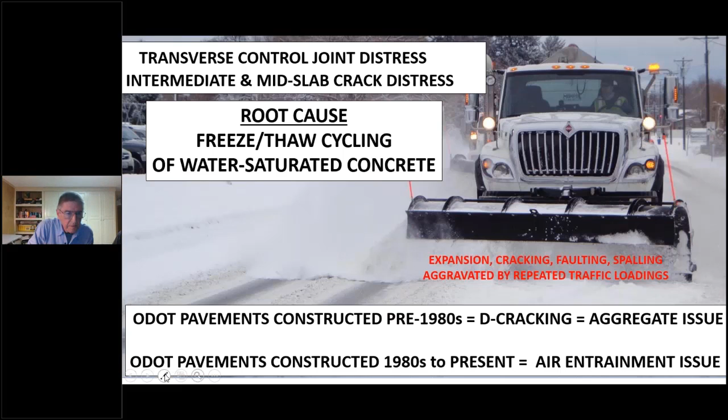The problem is still involved with freeze-thaw cycling and distress associated with it, but in this case it's an air entrainment issue, which I'll discuss.

At the end of the studies in the 70s, a test pavement was constructed on one of the state routes around Vermilion, Ohio. It's 4-lane, 105 test sections, and that was monitored over that period, 75 to the early 90s. The PCA researchers at the time came up with a number of interesting conclusions with respect to what was affecting D-cracking at the time, which we'll talk about just a little bit.

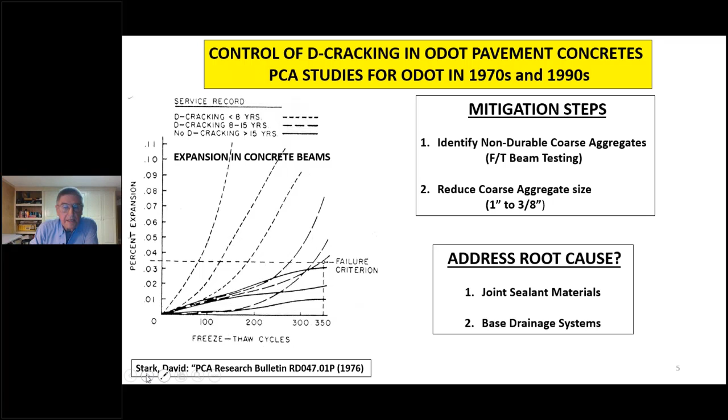But at the time, ODOT thought that the D-cracking problem was pretty much in control with the reduction of the coarse aggregate size, and that has been the case. So not much was done about the joint sealing or base drainage since that time.

The study that I mentioned in 2008, 2010, I was involved in with Ohio University. I can actually identify those publications that you'll have an opportunity to see.

We looked at 20 different PCC pavements in 11 different counties around the state. The pavements were selected on the basis of having shown above average performance, trying to see what was done right back then, so that was the case.

However, it was recognized that the joints and the slab cracking and distress were a major part of the problems, even with those. So all of the cores that we looked at were taken through the joints and through the cracks, and we took them in a region that was not yet showing distress in the wearing surface.

In a functioning air void system, on the left, in front of the advancing ice front, the water gets pushed into our little open rooms, which are the air void cavities, and is allowed to freeze in there, so that when the expansion from water to ice takes place, it's accommodated.

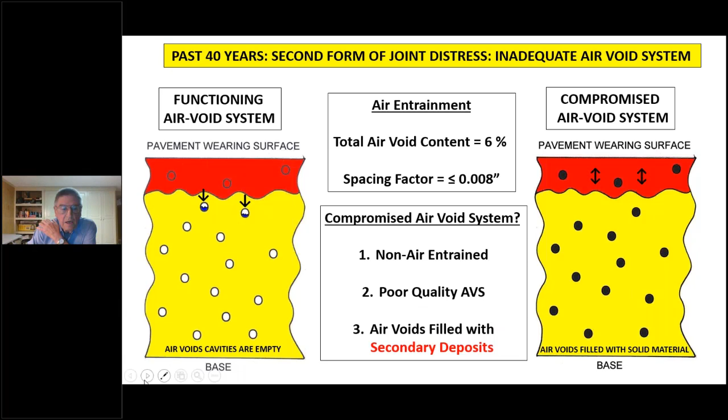We did not find any of our 20 pavements where the concrete was non-air entrained, and even in the case where the air void content was down, the spacing factors looked good. So what we've seen in all 20 of these pavements in the joints is what I'm going to be describing here, where the air voids are filled with secondary deposits and lose their ability to perform their intended functions.

What I'm saying is that if you consider that this is the joint area here, during cycles of freezing and thawing, during cycles of moisture migration, secondary deposits are moved to the air voids and they do get filled. I'll show this in the petrographic evidence.

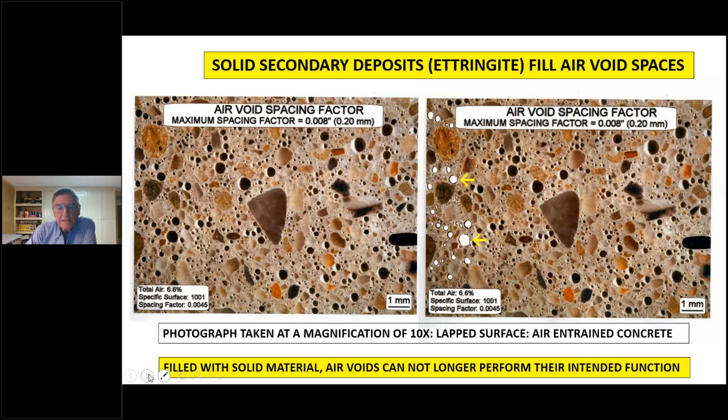So you'll see that the air voids in and around the joint are filled with secondary deposits, which primarily are ettringite. We think of ettringite as a destructive form of attack, but in this case, the ettringite in the air voids is innocuous, and it's very, very common. In fact, it's unusual to not see it.

So we look at the cores that we took where there was no distress on the wearing surface.

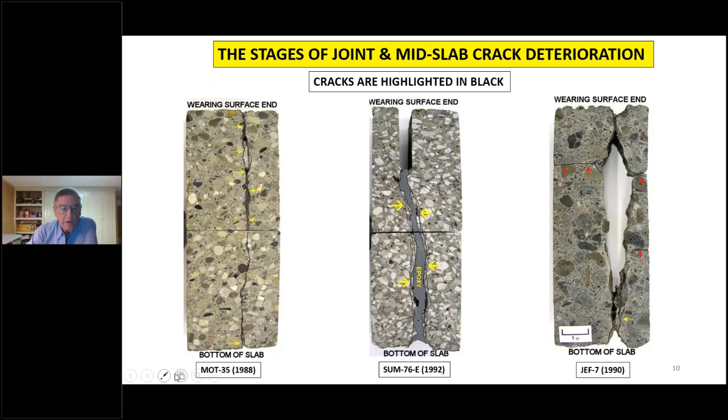Over on the right, you have the situation where the entire center portion is now missing. This was a State Route 7, Jefferson County, about 1990. Now, with the loss of support, you have traffic-induced faulting and cracking at the top of the slab as well. Those are pretty much the sort of things happening, but it's the same phenomenon going on, just in different stages of progression.

This is a photograph, a little enlarged view here of the center example there. This is Summit County, where in this case it was a neoprene joint sealant material. It was completely gone, and now you had a lot of scaled material that actually came out during the coring.

Spalled, I should say. And then these are cracks here, microscopic in size, but they're there. We would expect that the deterioration would continue over cycles of wetting and drying and freezing and thawing, and eventually, with support loss, we would start to lose the section up here.

At the bottom of the core, we're beginning to see the start of that cone-shaped type of failure as well. What we're going to do in the next two slides is show even closer microscopic pictures of this area, which we'll designate as area A, and then the area at the bottom, which I'll designate as area B. We'll be looking at this under the microscope to get a clearer picture of what's going on.

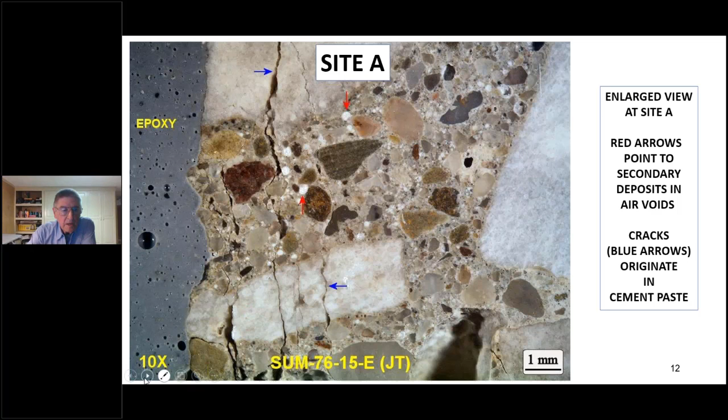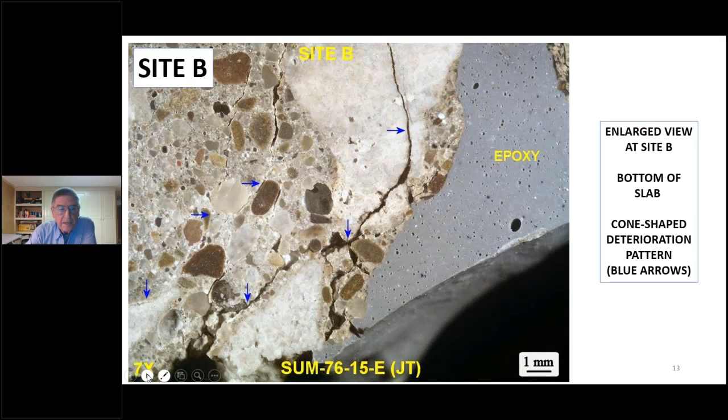So the obvious logic there is, if you solve the joint crack distress problem, you're going to extend pavement service life. And to that end, I talk about this whole situation.

We know how to make sound, durable concrete today. 19 of the 20 pavements from the study I was involved in were just good old Class C, ODOT Class C concrete. It was made with water-cement ratios like .43 to .48. They were air entrained, and half of them contained fly ash, so they had low permeability. But we can make good concrete, and when you rehabilitate or remove pavements, the stuff on either side of the joints and cracks comes out as big, large chunks that are still in pretty good shape. So we know we can make good concrete.

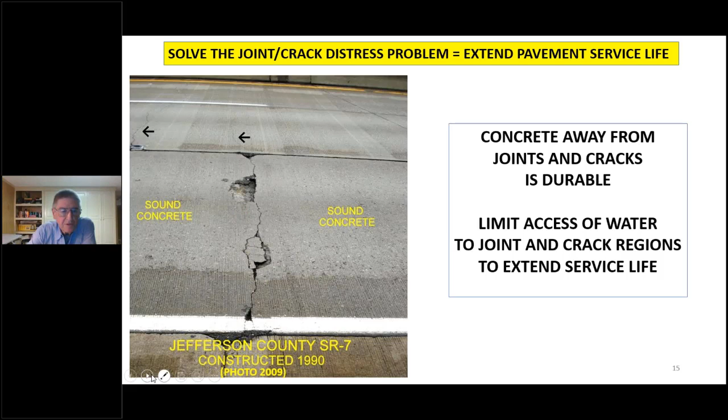So we can get a handle on this situation. We can be looking at, and I want to use the term, 50 to 100-year pavement life. So is it possible to keep the water out of the joints and cracks in the PCC pavements? The answer is probably not. We can't keep it all out, but if we had joint sealing materials that worked and are durable, and base draining systems that worked and are long lasting, it sure could go a long way toward making things better and getting more life out of our pavements.

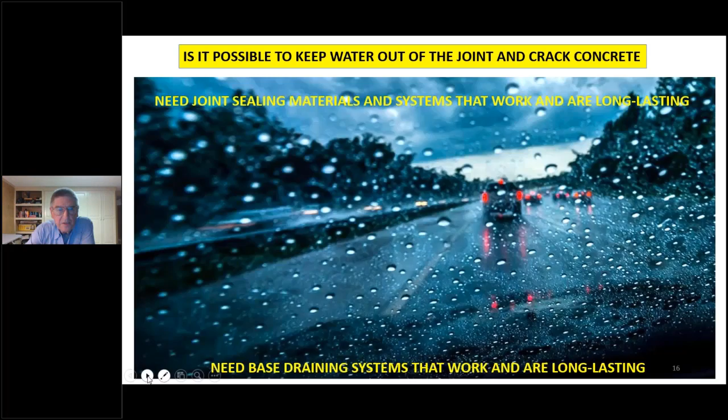PCA workers did look at that situation, and they found there was a lower incidence of D-cracking where hot pour sealant was used compared with the neoprene preforms. They said the incidence of D-cracking was still relatively high all over, but the conclusion was that hot pour sealants are in the right direction, so they're certainly worthy of further study. And of course these days we have a lot of synthetic polymers that weren't around back then too, that could function perhaps just as well.

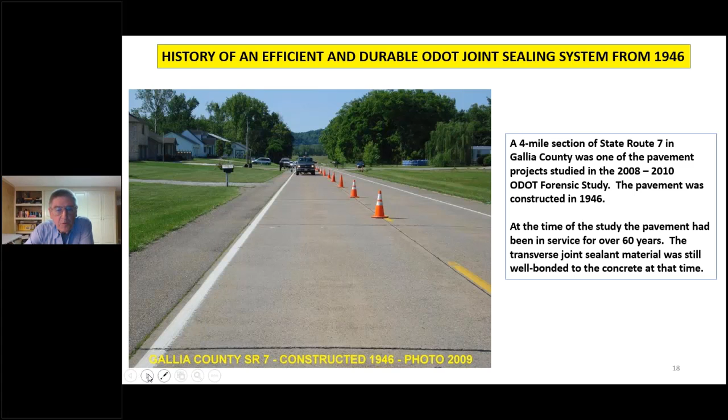We have an example of an efficient and durable joint sealing system in a pavement constructed in 1946 down in Gallia County, a 4-mile section of State Route 7. We took cores there in 2009, over 60 years of life. That pavement is just being removed now, so it's over 70 years of life. So there's an example of, yes, it can be done. 40-foot joint spacings here, 8 inches thick. Now granted, it is a state route, but the majority of the joints were looking good at the time we took the cores.

They had at that time, 1946, a joint sealant material and a design that is not used now. The joint was formed with a metal joint form that was flared at the top, about 3/4 inch at the top, about 2 inches deep.

That was put in at the time of pavement construction. It was removed when the concrete received initial set. They waited until the concrete cracked, and then poured a sanded bituminous hot melt into the formed joint space, which filled the space they had created, and also went down into the crack itself. Those were still there at the time we took the core.

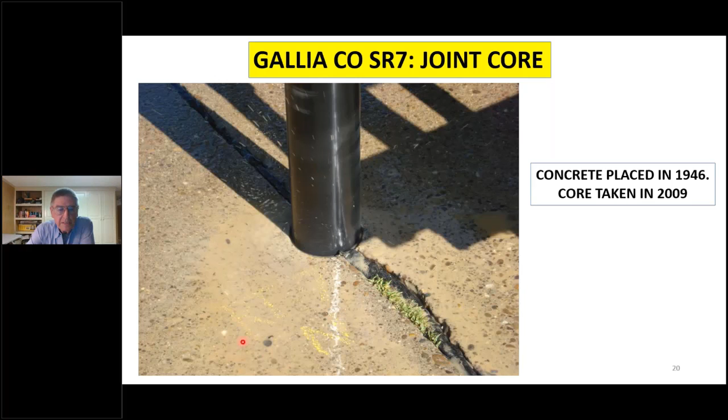This shows the coring, and you can see the material is still elastomeric after 63 years. The core was taken and looked at. We sectioned it and lapped it, and this is that core from the transverse joint.

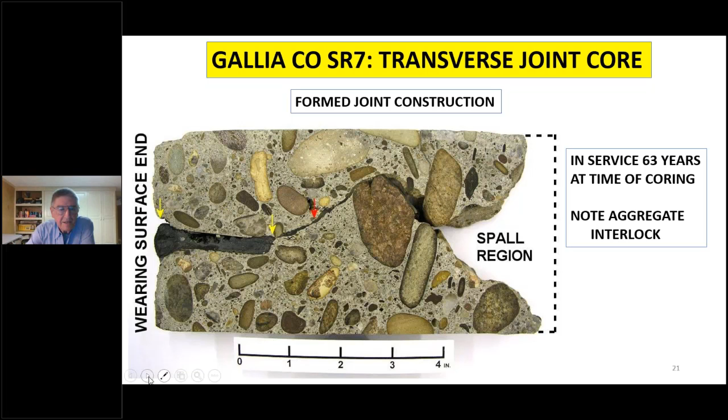So we have a lot of things to think about here. Base drainage - the researchers back then said D-cracking can be delayed and possibly eliminated by the use of drainage facilities, and it should be considered, recognizing the root cause. They also had test section number 4 out of 105, where the maximum aggregate size was 1.5 inches, and the granular base was daylighted, carrying through the shoulders, so there was base drainage there. That particular section had 17% D-cracking in the joints versus 65 to 94 in all the others.

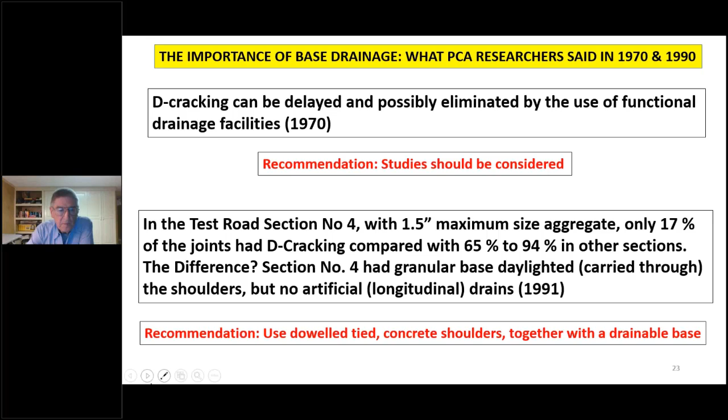They recommended using dowel-tied concrete shoulders together with a drainable base, again recognizing the root cause of the problem as being pre-soaking the concrete in saturated condition - keep the water out. So I think it's not illogical to think we can do 50 to 100 year PCC pavements in Ohio. We know we can produce durable concrete pavements themselves, even good old Class C made right, particularly with fly ash these days. Maybe that should be mandated to keep the permeability down.

Looking at joint sealing materials and design, we have some precedent to go with there, as well as drainable bases. This probably can't keep all the water out, but reinitiating some studies on the bases and joint sealing materials seems certainly worth considering. Also, if we can do that, we can start using bigger aggregate again to produce aggregate interlock, which is also going to improve the stability and structural integrity of the joints.

So that's my story today. I appreciate your time and your interest, and I look forward to hearing your comments and questions. Thank you very much.

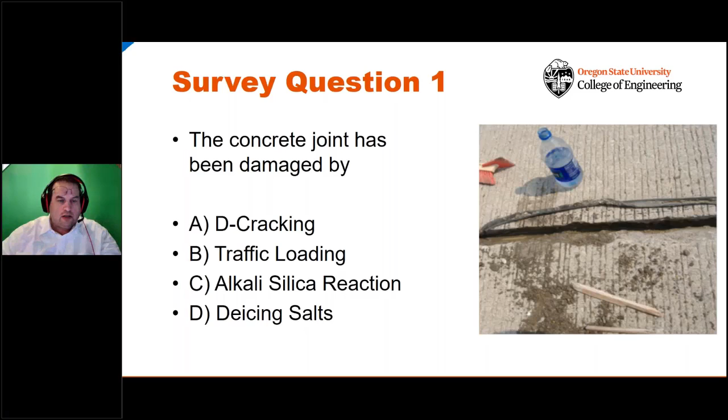We'll start off with our first poll question. The real question I'd like you to be thinking about is this: this is a concrete joint, this happens to be in your neighbors to the west, and this happened to be a quality award-winning pavement. The question is, what was really the cause of the damage in this joint? Is it D-cracking? Is it traffic loading? Is it ASR? Or is it de-icing salts? I'll give everybody a few seconds to think about that and put their answer in. I'll mention that this is one of the joints that's really driven a lot of the work we've done over the last 15 or 20 years.

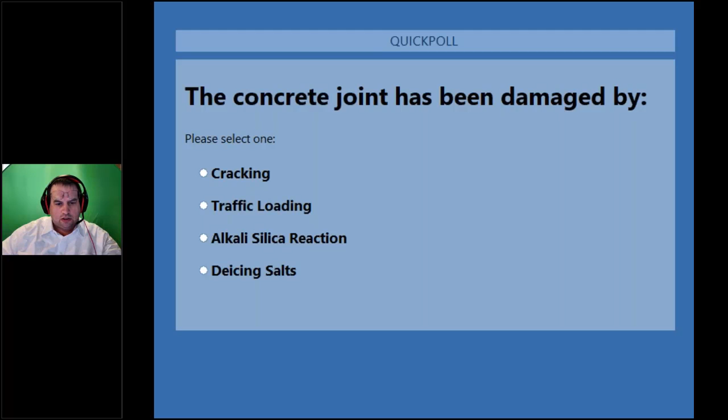We've got about 5 seconds left for folks. If you answered de-icing salts, letter D, then you're all set, and that is the direction we really want to go. I believe, okay perfect. So what I'd like to do now is get into a little bit of discussion on what we're doing around the deterioration of pavement. I think I need to go back and show my screen again.

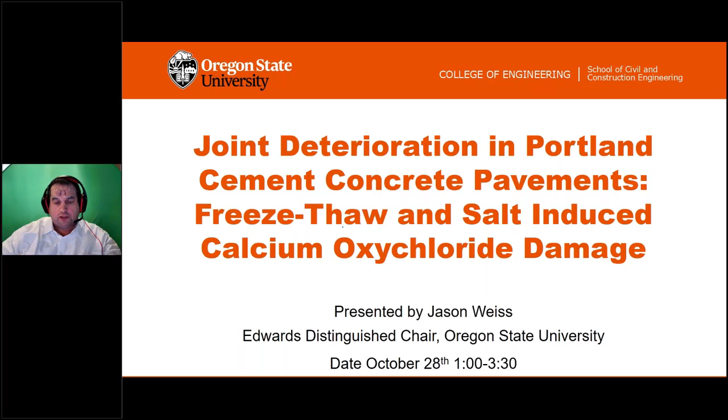So what we'd like to do is talk a little bit about the joint deterioration that's happening. We believe there's an additional chemical reaction taking place that can be responsible for some of that infilling and some of the damage we've been talking about. So this is a big issue.

This is damage that's happening at joints across the nation. When we first started doing this, we asked around and we were told it was an Indiana problem. Then we were told it was a Midwest problem. And if you define the Midwest as anything that stretches from Maine to Oregon, from Canada down to almost Mexico, then it is a Midwest problem.

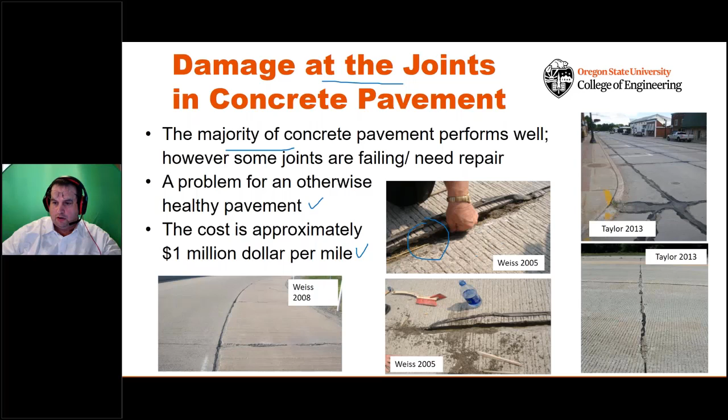But the issue here, as was previously mentioned, is the majority of concrete pavements are performing well. However, some have these joints that are starting to deteriorate. This is a problem because you have a great pavement otherwise, and it's costly to go out and do some of the repairs on this. What we really want to talk about is what is the cause, not necessarily who to point the finger at, but how do we start to solve this.

So when we first got involved in this, I went to a meeting and looked at my notes a couple years afterwards, and I went through and saw all the people who were blamed as part of this process. What I'd like to do is suggest that there may be times where there's something additional going on in these cases.

Over time, we developed a little bit of a working mechanism. This is primarily developed out of what was done in the state of Indiana, but the whole idea is: they'll come in very early and put a saw cut in. That saw cut comes in. The second step is we get cracking in the pavement. That crack will essentially help stabilize the width of the joint. They come back, widen the saw cut, put in the backer rod, put in the sealant.

When all this is done well, it keeps fluid out from getting into the joint. But as was discussed in our previous talk, it's all too often that this sealant didn't work really well. So the sealant detaches in some way, fluid gets into the joint. What we noticed is many times the joints didn't crack. So the fluid was essentially sitting in this joint, saturating this region of the concrete, leading to a high degree of saturation, which could cause this portion of the concrete to fall off and spall, or we can start to get progressive layers of this de-icing salt damage that you saw with that progressive microcracking shown in the previous talk.

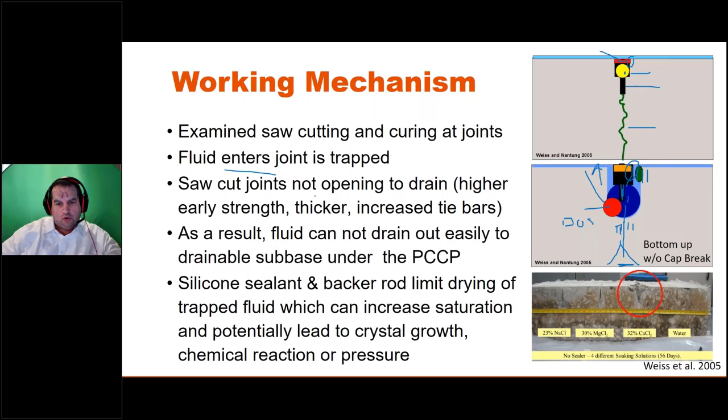So the idea here is fluid enters these joints, and I'm going to use fluid instead of water because it's going to be very concentrated in terms of the salt that we're dealing with. The joints are not opening as much as they needed to, and we're essentially getting this fluid trapped, and it starts to react. As I mentioned, it's not just water, it's salt. There's a couple things that are really important about this.

First, we change the properties of the fluid. Salt water is much more viscous, and in fact we add viscosity to these systems to get the salt to stick to the surface. This changes the transport properties. The second thing is the salt itself changes the saturation of the concrete.

The third item is we can get a potential reaction that takes place inside of the cementitious system. So if we look at relative humidity versus the concentration of salt, what we notice is there's an equilibrium point that we can see here for the three most common de-icing salts. Anytime we're below this relative humidity, we're going to suck water out of the atmosphere to try to raise the humidity level inside of the system.

So what this means is when you've got a salt inside of your system, you're going to have concretes that stay saturated for a much, much longer time. We don't get the evaporation that's taking place. So if you have, for example, 25% magnesium chloride sitting in the joints, which is very possible, drying doesn't start to take place until you drop below 60% relative humidity. Above this, you're going to see moisture just getting sucked into the overall system.

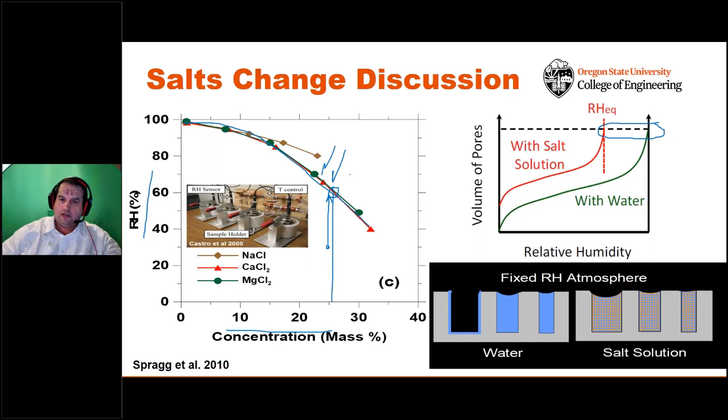The second question I would ask here, and maybe we won't go to the poll just to prevent any challenges with the screen, is: the degree of saturation in concrete that has de-icers applied is higher than, lower than, or the same as concrete in the same environment without the de-icing salt applied. And I think what we all can tell is that we're going to essentially get a higher degree of saturation.

This is incorrect, we should have had the answer of A. We're going to have a higher degree of saturation, so we're going to essentially get more freeze-thaw damage, more typical classical freeze-thaw damage, but that's not what I'm going to spend a lot of time discussing today.

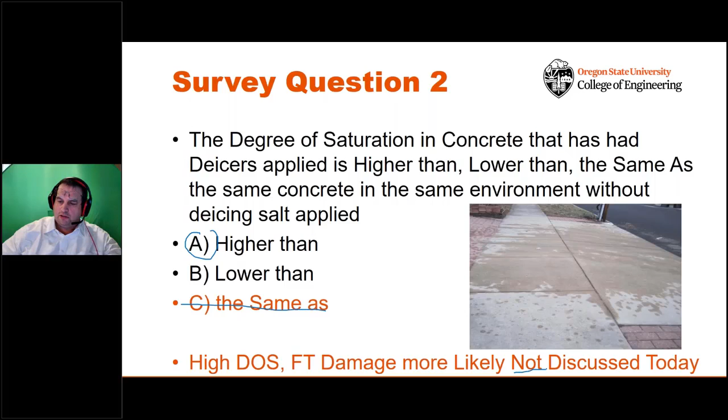So we can get higher amounts of water in the system. That water sits in the joints. The fluid isn't necessarily water. It's going to fill in the pores with secondary deposits, as was talked about, and we have a degree of saturation model, but this isn't the part I'm going to talk about today.

What I'm going to talk about is the other side of the coin: the fact that there's a chemical reaction that takes place in this system, and these newer salts that we're using, and the pre-application pre-wetting of the salts that we're doing, are giving us new reactions that give us a new problem that is something we haven't been aware of historically in the cement and concrete world.

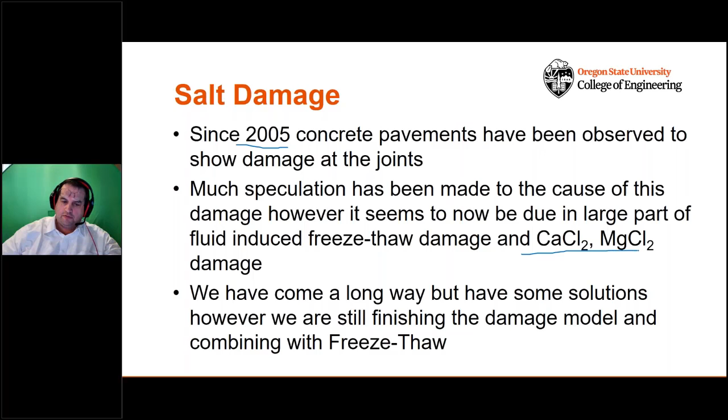So this is a little bit of background, but the whole idea here is there's lots of attention that's been placed on this over the last 15 or so years, and it really has to do with the growth of new types of de-icing salts that are being more widely used and the use of these salts in pre-wetting events. So what we really wanted to do is start down a path of identifying the reactions that could take place. Once this was done, there was a lot of fundamental science that needed to be done to really look at the reactions and see what temperatures they happened at, to develop a test that could tell us about these reactions, examine some potential solutions, and then really start to move this into full-scale applications and field use.

I'll also briefly touch on some computational modeling that we're doing, where we can now predict the behavior of these systems before they're ever even in a trial batch.

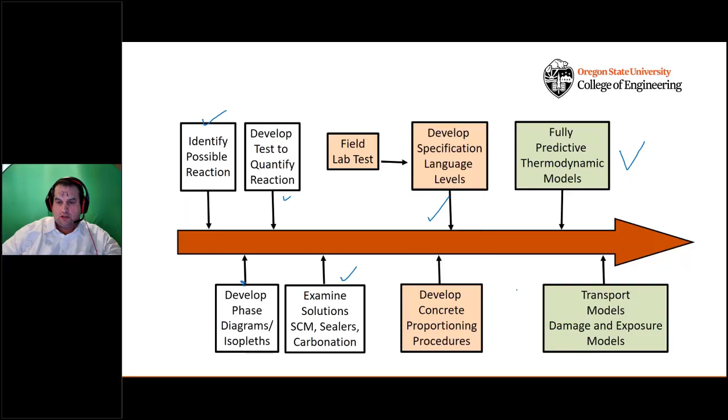We can start to predict the overall behavior of the systems. So now is where it really starts to get fun and gets exciting.

This is commonly known, and if we look through the literature, this is described and is probably going on in hundreds of chemistry classes each day, this sort of technology that we've talked about here.

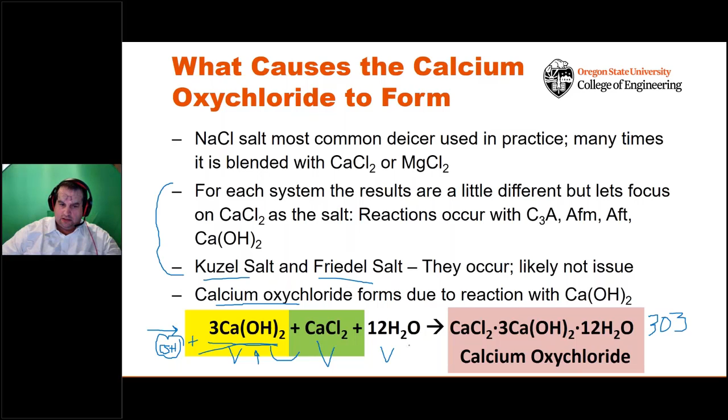So just to put this into perspective, we freak out about designing our mixtures to withstand water transforming to ice, which is about a 9% volume change. But here we have a 300% volume change going on in the system. Clearly, this can be leading to some of the damage.

So what we've done is we've developed a simple test. We take some ground up cement paste, put it together with the deicing salt, and increase the temperature from about minus 90 degrees up to about 50 degrees.

Some people have said, why do you go to minus 90 degrees? It never gets that cold even in Ohio. The reason we go here is because we want to get all of the phase transformations to take place so that we can quantify what's happening in the system.

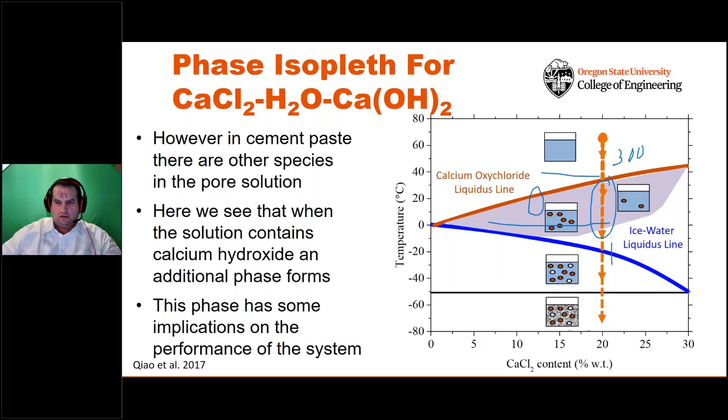There's some really big implications here, because now we're forming this oxychloride, this expansive phase which can be damaging our concrete. There's a couple things really scary about this. One, it's about a 300% volume change. The second scary thing is the temperature range it's happening in. So while we may have 150 or 200 freeze-thaw cycles a year on a concrete pavement, we may have 800 oxychloride cycles because of the temperature range it's happening in. This can have some really significant impacts.

So how do we solve this problem, or what are some potential solutions? One of the simplest solutions is to dilute the system, to use less cement. Lots of times people say, well, I want to use more cement because I want to make it stronger. But by using more cement, you make more calcium hydroxide, and by making more calcium hydroxide, you make more calcium oxychloride. You've actually exacerbated the problem, not solved it.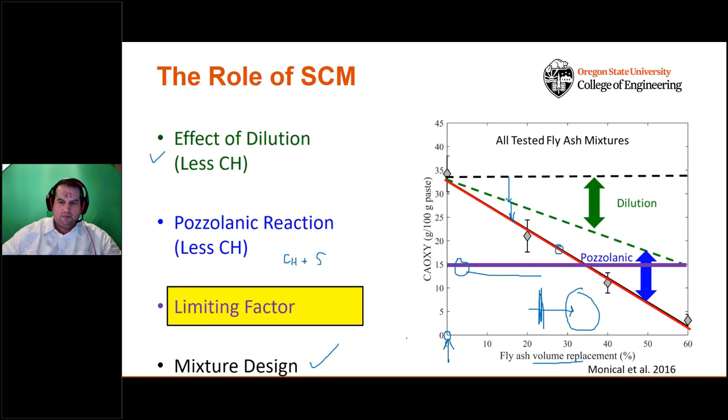Now, a couple of things you'll notice: we can measure the flexural strength of the paste. If we expose these pastes to de-icing chemicals, we see a slight reduction even in systems without oxychloride forming. We tend to see about a 10% decrease, simply because of the dissolution of the calcium hydroxide. The calcium hydroxide just leaves the system, it dissolves, and we see a small decrease.

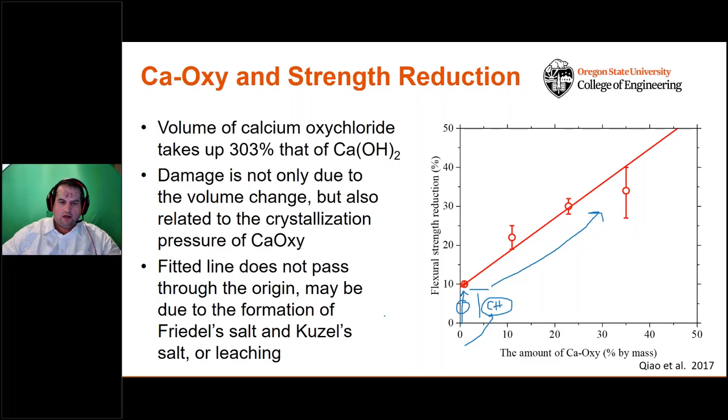But as we get more and more oxychloride going into the system, we see bigger and bigger strength reductions, because we're introducing microcracks, we're introducing damage in the system, and we're starting to cause these problems.

So again, I'll ask a simple question here. We won't go to the poll question just to make sure we don't lose connection, but: adding fly ash material makes my concrete more susceptible to joint damage. As such, I should specify concrete pavements using straight cements and add a little extra cement to make it stronger. Is this true or false?

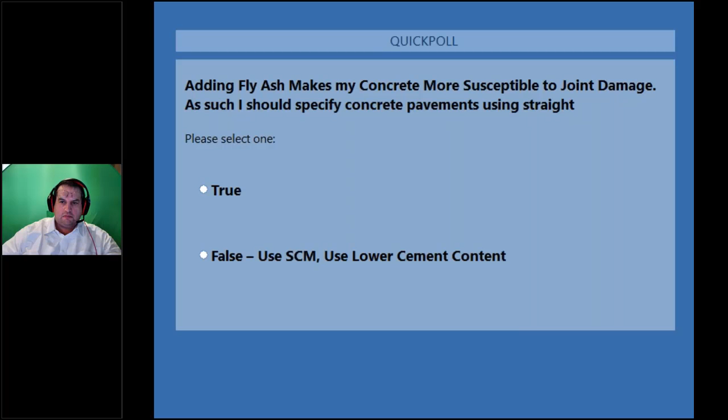Well, hopefully now we've seen that fly ash actually makes things better. The whole idea is we want to use more SCMs, use lower cement content, and this actually makes our concrete much more durable. So this statement is completely false. Fly ash doesn't make our concrete more susceptible to damage, it makes it less susceptible to damage. Straight cement mixtures are the most prone to these types of damage that we can have.

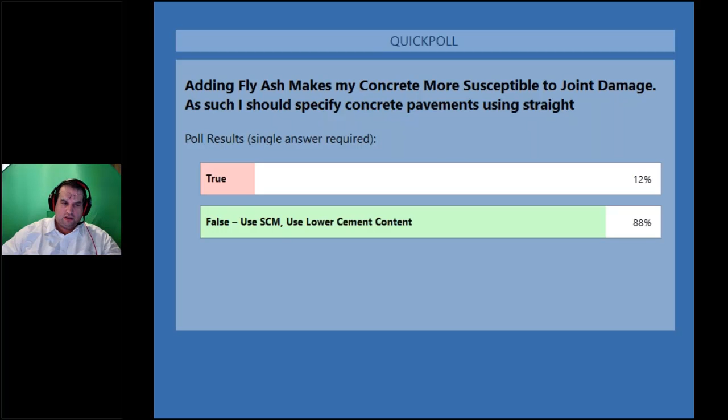This is one of the things we observed in the labs, and we were told many times that we were wrong on this. Everybody said, oh, the damage occurs on freezing. The damage doesn't occur on freezing. The damage actually occurs on the expansion, because the oxychloride is redeposited in spaces it wasn't supposed to exist.

So here's a little bit of information on the oxychloride itself. Here's a picture of this from Karl Peterson and Karl Peterson's group. You can see kind of a crystal. On its own, it's a really pretty looking crystal.

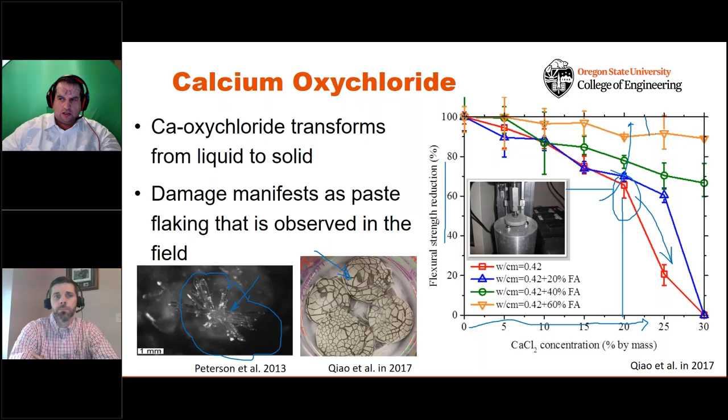And if you go higher than that, the strength goes almost all the way down to zero. One of the ways you reduce this potential for damage is to use more and more fly ash, and the only thing you're going to see here is a little bit of dissolution happening in the overall system.

Now, one of the things that we did was we said, is this just one fly ash, or is this just one mixture? At the time this particular paper had been created, we had tested about 300 different mixtures from across the Midwest. What you'll notice here is calcium hydroxide plotted as a function of fly ash replacement, with all the data plotted here at 20% and 40% replacements. What we notice is a very, very consistent trend.

As we add SCMs, the amount of calcium hydroxide, the amount of calcium oxychloride, decrease. Now, on the graph on our right-hand side, you may look at this and say, oh, those are nice little error bars. These aren't error bars. These are a collection of all the data if we normalize by the original amount of calcium hydroxide in the original system. So we essentially say, how much calcium hydroxide did you originally have, and how much does it decrease?

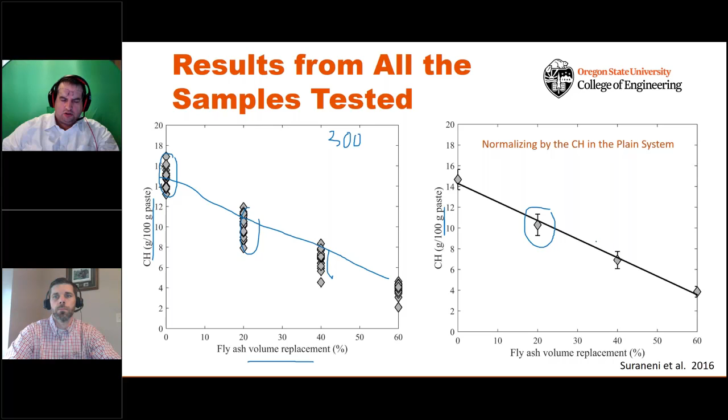What we see is there is a very, very consistent trend. More fly ash is better, more slag is better. Silica fume would be great, except it's hard to get into a pavement without causing other issues. Clays can be very useful if they're calcined in these systems. As expected, calcium hydroxide decreases, and when calcium hydroxide decreases, calcium oxychloride also decreases in a very similar fashion.

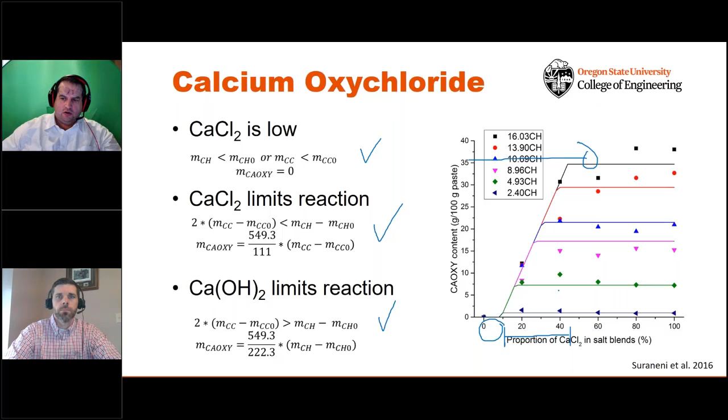Now, as I mentioned earlier, we've been developing computational programs that we think really give us a lot of power to look at these systems in great detail. This is a technique called Gibbs energy minimization, a thermodynamic modeling technique. What we do is essentially take all the atoms and all the molecules and throw them into the pool, and then we let them react and see what happens over time.

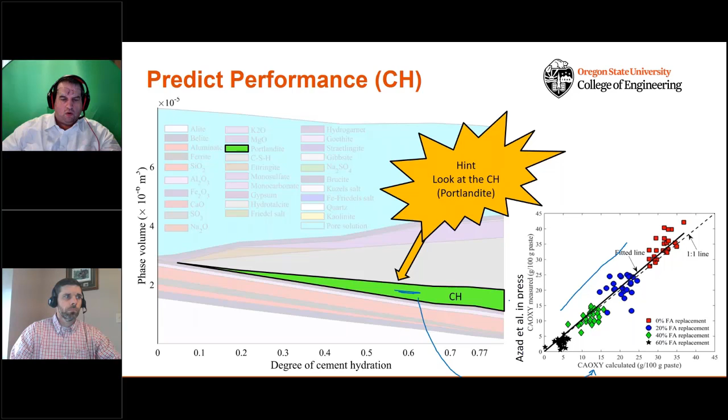You see there's a very good correlation to what we start seeing when we do these same experiments in the laboratory. We then started to work with some of our friends at PCA, and they were able to provide us with information on the chemical distribution of all the cements in the US, and we combined that with the distribution of all the fly ashes being used to make concrete.

We performed an analysis called Monte Carlo simulation. So rather than making 2 mixes or 3 mixes, we computationally made, I believe, about 350,000 different mixtures. By making those 350,000 different mixtures, we were able to provide a 95% confidence band on the amount of calcium hydroxide being produced as a function of the degree of hydration of the system.

So what we can do is say for all of the North American cements, this is the range of calcium hydroxide you'd expect to develop in this system. This tells us we shouldn't be comparing a blue bag of cement versus a green bag versus an orange bag, because everybody's producing it to have a very similar amount of calcium hydroxide.

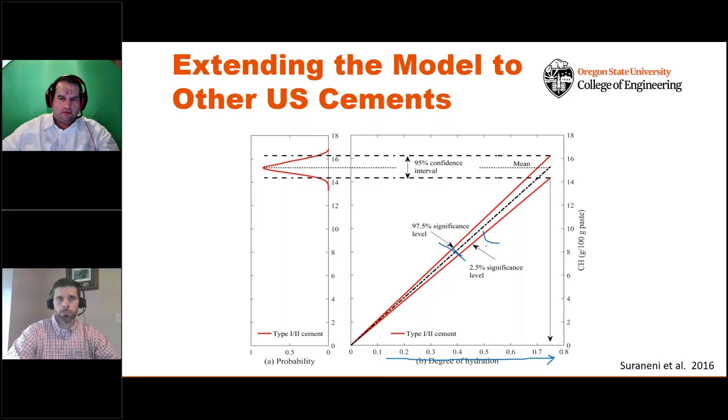When we started adding fly ash into the system, we saw a huge trend consistent with before, the oxychloride decreasing as we increase the amount of fly ash. But that band is relatively well distributed and forms a really good normal distribution. So we can start to use this approach to describe the parameters we should put on specifications if we don't know the composition of the fly ash or cement going into the system. So now we can ask, what level of probability of failure are we willing to live with?

We can now say, well, if we don't know anything at all about our fly ash, let's pick this particular value as our specification limit.

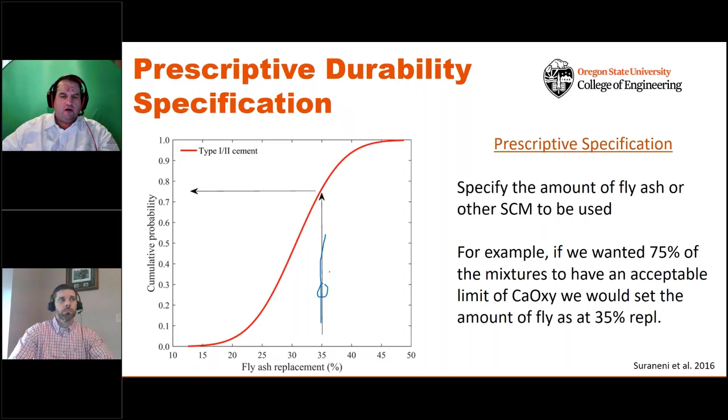Most of the time, we've noticed that in specific regions, for example if you wanted to do this for Ohio, you could very much limit the number of fly ashes considered. You don't have to consider all the ones from across the country. Use the 13 or 15 that come into that market, and you can get a very tight specification that works for that local area.

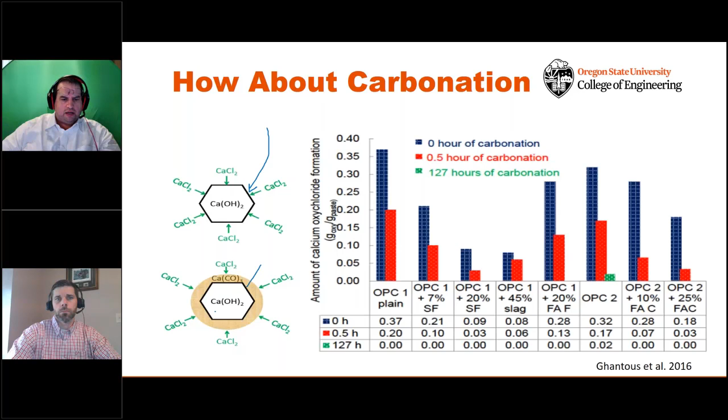The other thing we noticed that seems to work fairly well to reduce potential for damage, and this is a little counterintuitive, is if you actually get the system to carbonate a little bit, the CO2 reacts preferentially with the calcium hydroxide and forms like a little candy coating. You can think of it a bit like an M&M shell that can protect it from calcium oxychloride.

In addition, we can use a topical treatment, and here's a soy methyl ester polystyrene that's working very well to prevent moisture from getting into the concrete itself and causing this damage.

So in conclusion, a lot of the damage happening at the joints is due to salts and saturation. Salts increase the degree of saturation. Oxychloride reacts, coming from a combination of calcium chloride and calcium hydroxide. We have new techniques to look at these mixtures, and we have several ways to avoid this damage.

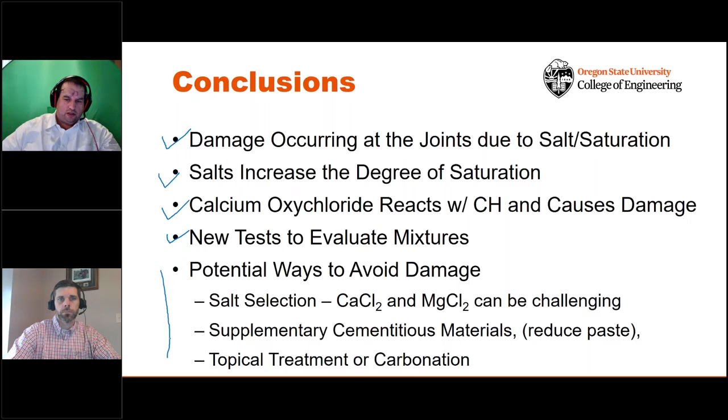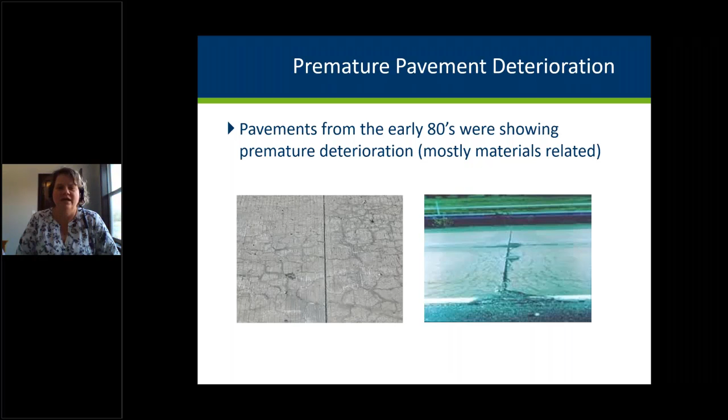So back in the early 80s, MnDOT's pavements were starting to show some premature joint deterioration. Mostly these issues were materials related. David talked about D-cracking quite a bit. MnDOT has D-cracking aggregates that we don't allow anymore. And then sometime in the early 90s, we started to talk about ASR, alkali silica reactivity, and maybe we had a few pavements that seemed to be exhibiting some of those sorts of distresses. But pavements that were built prior to this time, we weren't seeing a lot of these distresses. And then all of a sudden this started to come up more and more, and we had to figure out what we were going to do about it.

So when I say we, it was not me, it was others before me who started to develop these kinds of specs and concepts. In 1995, MnDOT moved away from the strength concept to a low water cement ratio specification for acceptance. That veers, I would say, quite a bit from what a lot of other states do. Many states have water cement limits, however they still focus on using strength as one of the primary acceptance modes. MnDOT does not do that.

What are the three principal factors that guide the current specifications? Mix design durability, incentives and disincentives. We focus a lot of our efforts and our specs built around the concept of rewarding the contractor for excellence and giving them monetary adjustments for non-compliance. Our incentives are focused on a max water cement ratio, aggregate quality, and well-graded aggregate. And then I'll talk just a little bit more about that. The other big factor that came with all of this was improved curing materials and practices. We did not have very good curing on our pavements, and we found when we made these changes, we needed to really improve our curing.

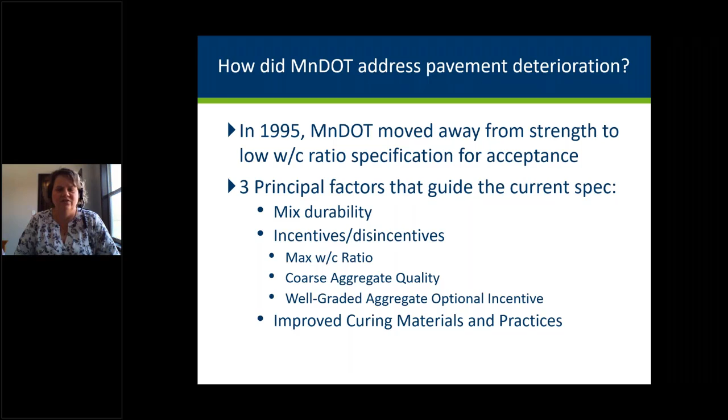So what did our specs look like? Prior to the change, MnDOT designed the mix designs. When we switched over, we started to get the contractors engaged in designing their own mixes. It took a few years to actually get them to design their own mixes though.

But in comparison, our water cement ratios were 0.46. In 1995, we went to a max of 0.40. We reduced our minimum cement content. One of the things we did not do was reduce our minimum cementitious though. That's something I think we'll look at in the future, is taking some more paste out of the mix. But we did limit it, minimum to 530. A big change was we only allowed 15% fly ash.

So what Jason just talked about quite a bit was the use of SCMs. Our pavements prior to our change really limited the amount of SCMs in there, plus we didn't mitigate it at all. We didn't use any admixtures other than air entraining agent prior to 1995. And as I said, we'd accepted on strength. Post 1995, we were up to allowing 30% max fly ash, requiring some for mitigation of ASR. Up to our current specs, that's 33% fly ash. We allowed admixtures - water reducers made a huge impact on reducing the water cement ratio without a lot of other changes, and we increased our target air content to make sure we had enough air.

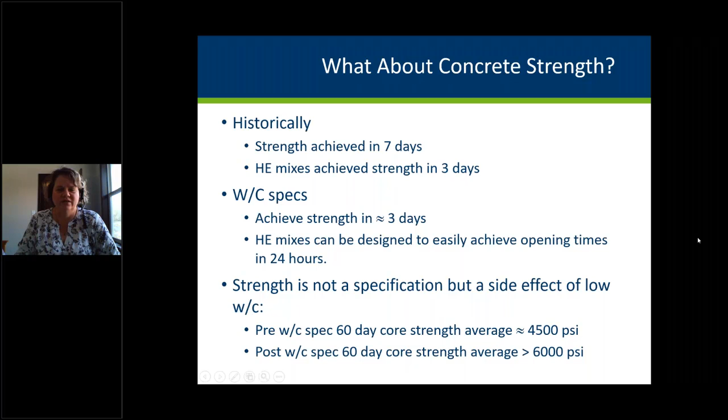So what about strength? I said that strength was kind of a byproduct, and MnDOT had a strength spec, but we designed our own mixes. We couldn't hold the contractor to anything because we gave them the recipe, we said follow it, and it was what it was. But what did strength look like? It was typically achieved in 7 days. Our high early mixes, our design, were 3 days. Once we switched to water cement specs, they saw that strength - they were starting to get it in 3 days instead of 7, and their high early mixes, they could get their strengths in 24 hours. When I say that, strengths - 3000 PSI flex, or compressive strength, or 500 PSI flexural strength - is the strengths I'm talking about. Strength is not a spec in our requirements, but it's a side effect of the low water cement ratio. I have a little bit more data to show you on that.

Now, this whole idea of water cement ratio - what do we do and how do we do it? Well, we take the concrete, and we've got a MnDOT plant monitor at the ready mix or at the batch plant, and they check concrete twice a day.

Why do we do that? Because we know right away in the field what kind of water cement ratio we actually have. We pay off the batch tickets verified by the microwave, so we're paying off the contractor's batching data. There's a little bit more involved in our spec, but the whole idea is we're paying off of a water cement ratio.

We're paying the contractor based on what the concrete they're producing is, not waiting 28 days for those strength results. Like I said, we do get increased strengths, and we don't have to wait. We've seen a lot of benefits to doing this, the microwave oven, even though we don't pay off it. We've been able to tell if a contractor has a fin go out on their water meter, and suddenly they're batching a lot more water that you may not notice on a ticket. So we've seen some benefits from that, and it's a way for us to verify in real time.

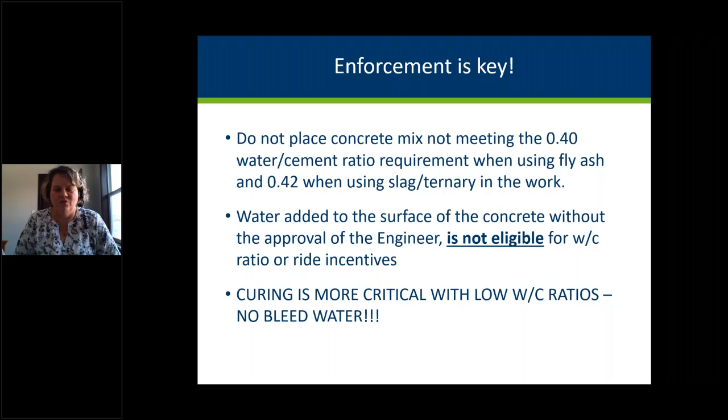So maintaining a maximum water cement ratio is very important to MnDOT, and so the contractors do pay a lot of attention to that. The other biggest thing we learned when we pulled the water out of the mix was that curing was more critical. We didn't see bleed water anymore with these mix designs, so we had to look at changing things.

With that, curing became extremely important to us. It was always important, but it became much more critical. What we found was it was probably the most ignored process of concrete construction, even though it was one of the most important. Our specs currently do allow the contractor to use a blanket cure or a membrane curing compound. We do see the contractors, unless there's cold weather, using membrane curing compound as their primary method.

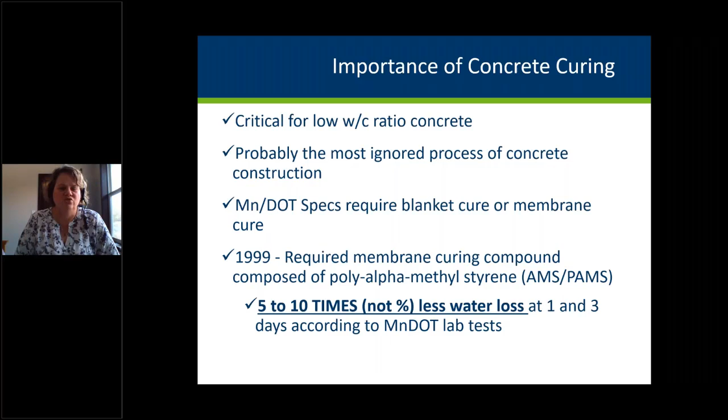In 1999, MnDOT switched to using the polyalpha methylstyrene curing compound versus the other wax-based and water-based curing compounds we'd used previously. Once again, with concrete curing, you can write specs that say what you really want, but MnDOT went one step further and we have actual language in our spec that says place the curing compound. We do have a coverage rate, but we say it should be equal to a white sheet of typing paper.

So it's a very easy tool for the inspector to use when they don't see uniform curing that's bright white on their concrete. And I would say overall statewide, for many of our concrete applications, we've seen a great improvement in the curing. It was funny that when we started pushing this, the contractor personnel on the cure carts would be looking at me all the time, pointing and saying, is this good enough?

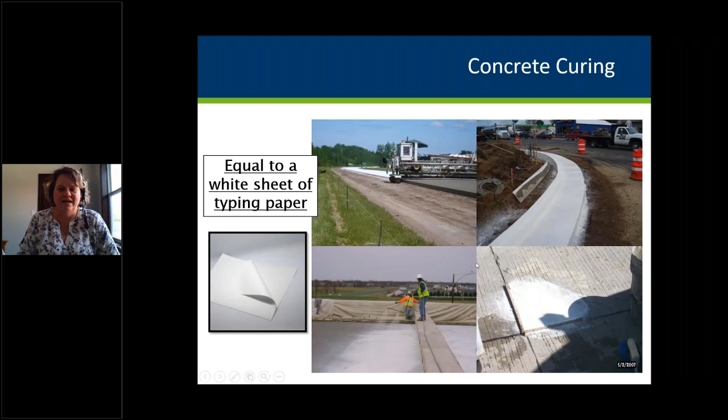So, very critical, our aggregate requirements. With our new specifications, we've got water cement ratio and we've got aggregate requirements. We actually require two fractions of coarse aggregate, a 3/4 plus aggregate and a 3/4 minus aggregate. What we wanted to do was really encourage the contractor to get more aggregates into their mix, because that was really all they were using.

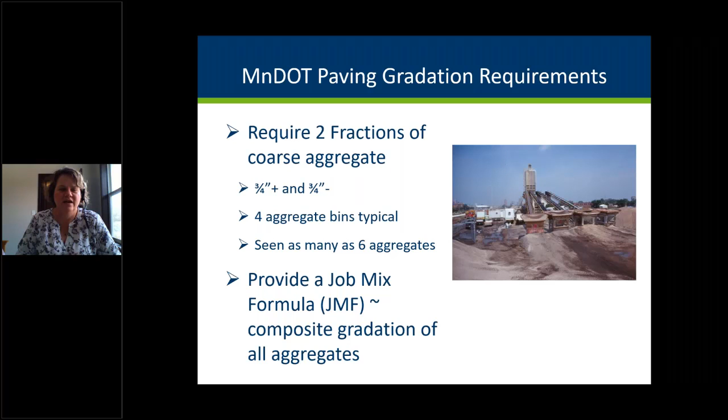At the height of our development and implementation of our specifications, we would typically see 4 aggregate bins. We'd see some sort of intermediate aggregate, like pea rock, buckshot, or coarse sand material. We'd see our fine sand, and we'd see a 3/4 plus and a 3/4 minus aggregate. Still to this day, contractors, if they can find an intermediate aggregate that meets quality and fits into their mix, are striving to use that because they see the benefits to the ride from that.

Now, we don't require the contractors to give us a well-graded aggregate. We give them an option to do that. The reason is the nature of the aggregates in our state - not every part of the state has that intermediate type aggregate that can meet our well-graded aggregate incentive. So we decided we did not want to limit them and require it. We did go through a point in time where we required it on a few jobs, and it actually pushed the contractor into struggling a little bit more - they were using 6 aggregates to get the surface closed up and get a decent ride.

And so we just looked at our data and decided that we could offer some flexibility.

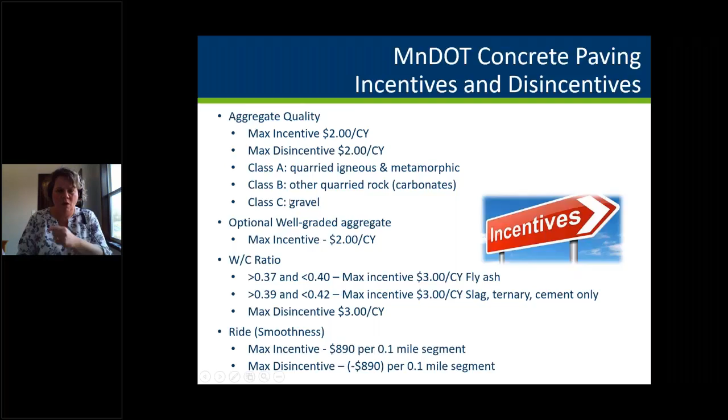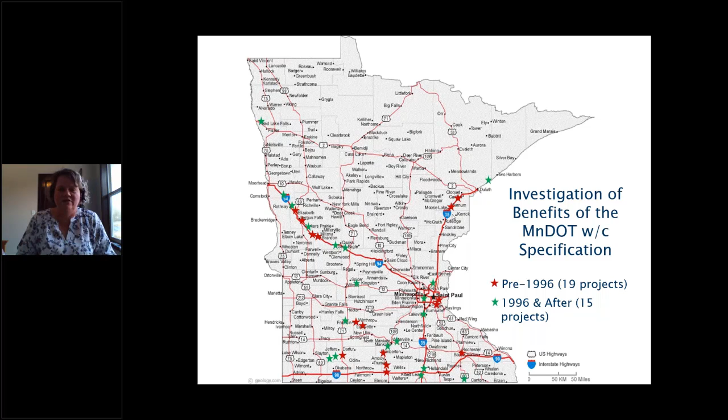So how did we know this really was working? We undertook an investigation on the benefits of the water cement ratio, looking at 19 projects before and 15 after the water cement ratio change. We took over 200 cores from these pavements and tested them. We found our air content, pre and post water cement ratio, was pretty similar. We increased our air content spec in the post era by 1%, but we were generally getting the air we were expecting in our pavements.

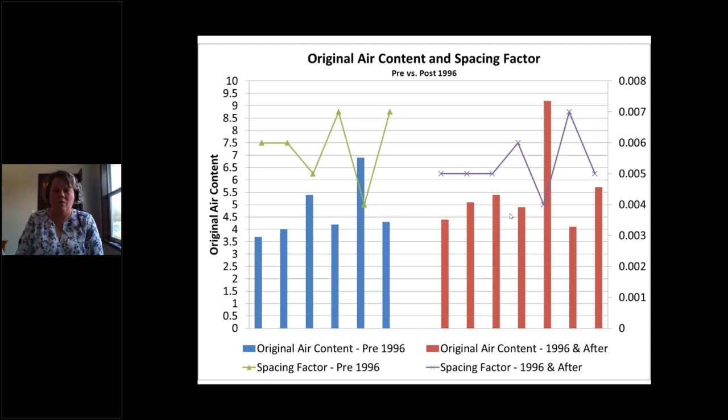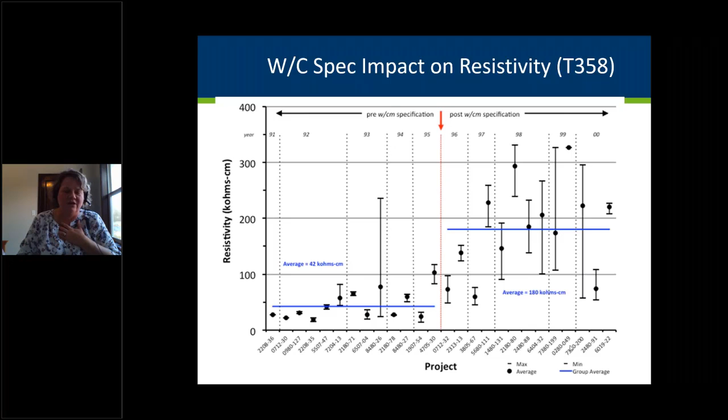Resistivity shows a similar improvement. Pre is on the left of the red dash, post is on the right: 42 kiloohm centimeters pre, 180 kiloohms post. So really a great improvement in resistivity as we reduce the water cement ratio and increase the SCMs.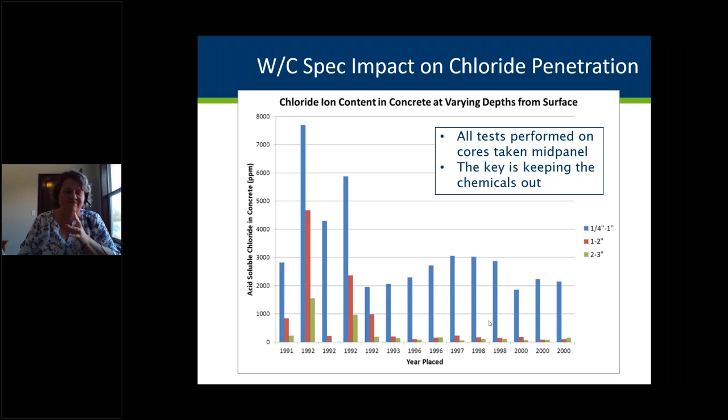I do not have the line drawn, but right in here is the pre and post water cement ratio, this is kind of the transition area. You can see the chlorides are still getting into the concrete, just like Dr. Weiss just talked about, but they are taking a lot longer to get into the concrete that's more impermeable with the lower water cement specifications. Once again, remember these pavements were all 15 to 20 years old when we did this testing.

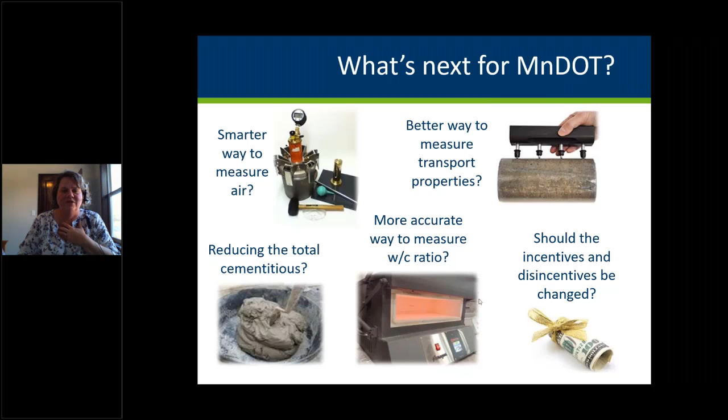So I don't know if you've heard a lot of talk about performance engineered mixes. MnDOT really feels we've got very high quality concrete with our current specifications, but there's always room for improvement. So MnDOT, much like many other states, including I imagine Ohio, is looking at what we can do differently with performance engineered mixes. Ways we're looking at it include smarter ways to measure the air, taking the paste out, changing our incentives - I think we're going to be doing some of these things very soon - and more accurate ways to measure the water cement ratio.

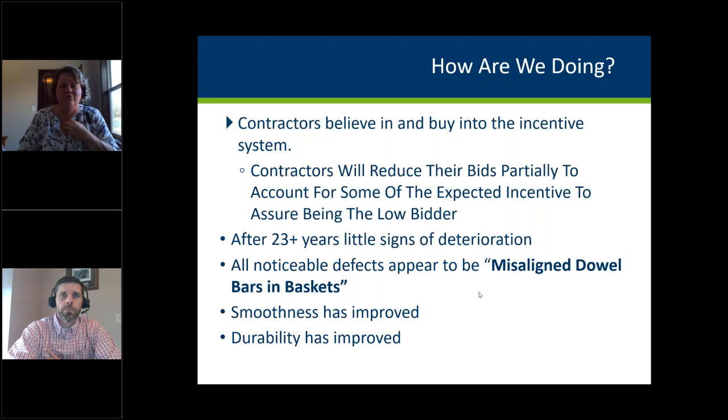So how are we doing? Contractors believe and buy into the incentive system. We've seen them reduce their bids to account for knowing what they're going to get incentives for. After 23 years, we've seen very little signs of deterioration. All noticeable defects appear to be misaligned dowel bars in baskets. Smoothness and durability have all improved.

So I'm going to run through this part very quickly, Craig. The second thing I was asked to talk about was whether we should seal joints or not, which has been some of the focus of this session. So I just wanted to briefly share what MnDOT's thoughts are on that.

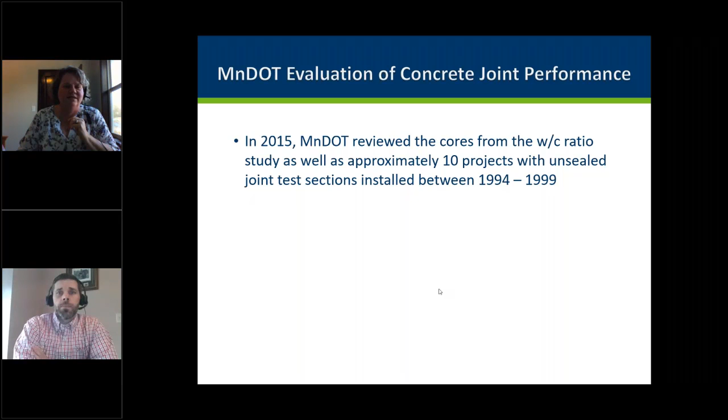Another pavement, this is pre-water cement. The seal is debonded from both sides, looks pretty good at the surface, but you're starting to see deterioration.

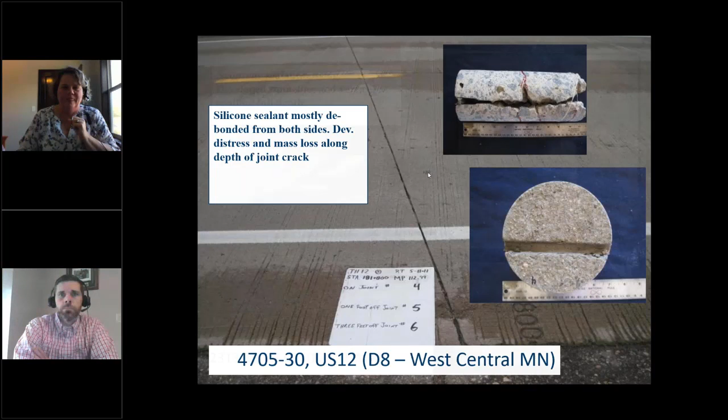Another one, the sealant happens to be gone. This one is early in our transition to water cement. You could actually see the water sitting in the core hole, so this wasn't draining very well, but we are starting to see a little bit of deterioration.

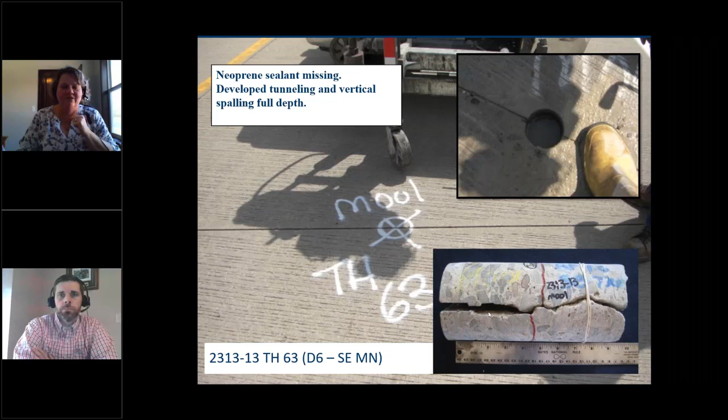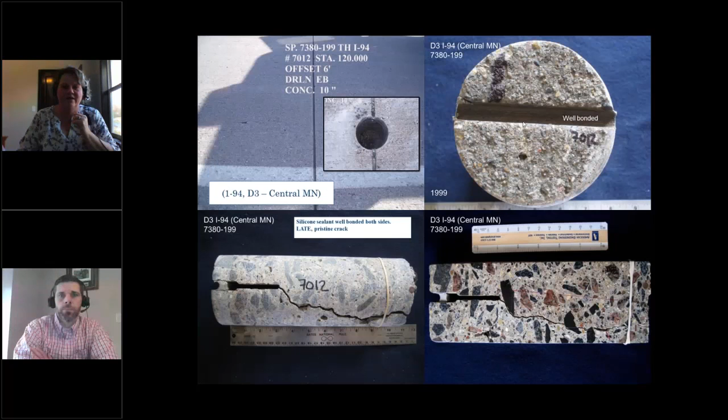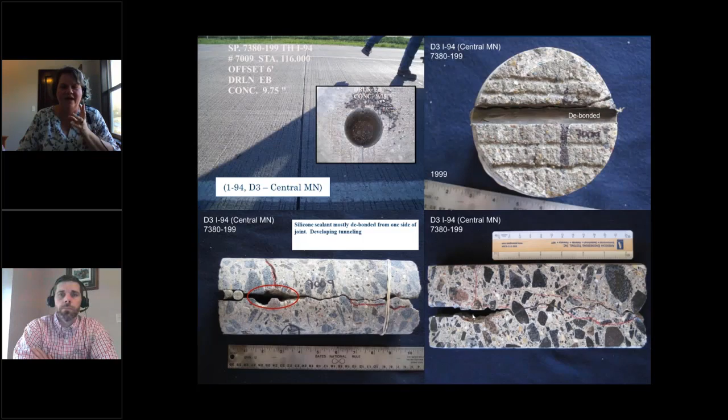I have a few more sections to show you. This hot pour was falling apart, we're starting to see some deterioration. Here, we've got a debonded seal, and we're starting to see some deterioration versus well bonded. Same project as that previous slide. Debonded, same concrete, starting to fall apart a little bit, slowly. Well bonded, looks just like the day it was paved.

Just a few more pictures to go with that. I'm going to scroll through these last few in the interest of time. Well bonded, like I said, they look perfect. Unbonded or poorly sealed, they just look tough.

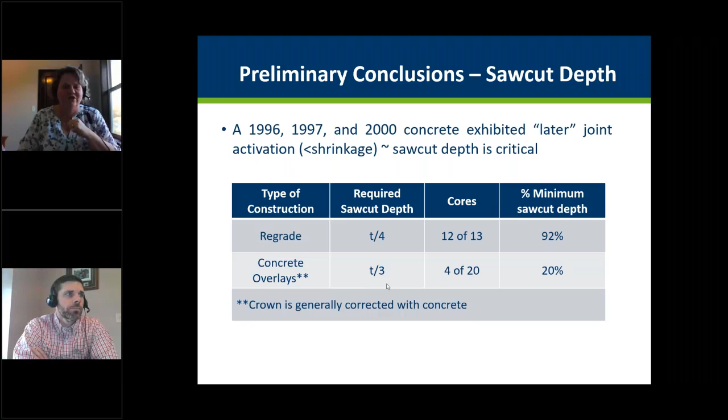A couple things we saw when we went back and looked at these cores was the saw cut depth. We found that we were not always getting saw cuts as deep as they should have been, so we weren't seeing the joints activate. The joints don't crack all the way through. Any de-icers that get into those breached joint seals are going to sit there and start to churn and cause damage. So we really focused on trying to make sure we were getting proper saw cut depths.

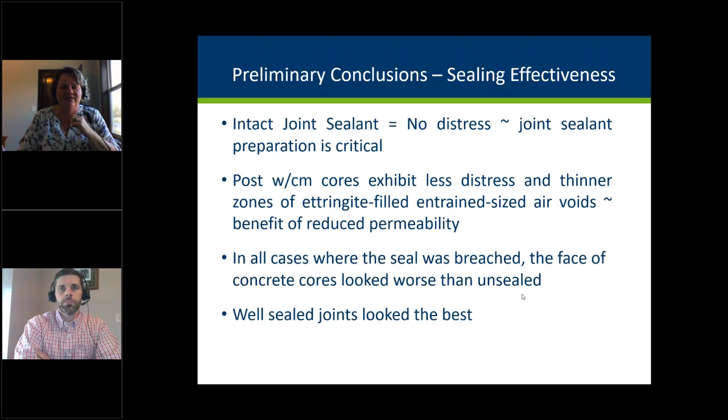So what were our preliminary conclusions on the effectiveness? When that seal is in good shape, everything is great. We saw the post-water cement cores exhibited less distress than the pre-water cement cores. In all cases where the seal was breached, the face of the cores looked worse than unsealed. And like I said, well sealed looked the best.

I just wanted to point out something. I'm not sure how many people have seen this, but one of the most critical steps in sealing joints properly is cleaning the joints. It's also one of the least expensive ones, but that's probably the one that is most omitted. And so I think that's why we don't get the proper performance of our joint sealants.

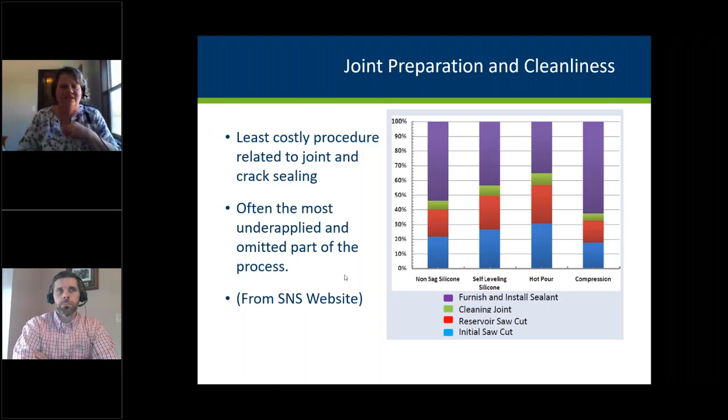What's MnDOT's current joint guidance? I'm waiting for it to come up so you guys can see what I can see. Maybe, maybe not.

So what MnDOT does is, MnDOT seals pavements that have speed limits less than 45 miles an hour. And we also seal white toppings that are 6 inches and less of pavement because we want to improve all of our chances of having a good bond. And then we also seal CPR projects. Everything else we don't seal.

I think I'm hung up. Oh, there they are. We use single saw cuts on all of our pavements, and we use hot pour, low modulus hot pour. We know we're just filling the joints, we're not sealing them, but we're especially interested in the lower volume roadways because the traffic just can't pull that debris out. So we want to do whatever we can to keep the incompressibles out.

Just a couple quick final thoughts on joint sealing. I'm a big advocate for joint sealing. I think well-sealed joints are the best joints. However, the contractors generally struggle to do it correctly, and so I don't think it's worth the cost to do it right away, especially. I think an unsealed joint is the second best joint, and a poorly sealed joint, unfortunately, is what we end up with. So I think that we need to focus on sealing. If we're going to seal the joints, we need to do it right.

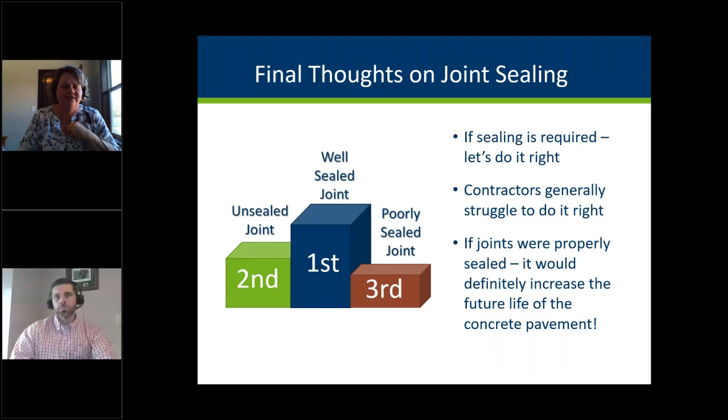And then that's all I had. I did put a link at the end for our water cement ratio study that I talked about at the beginning. Thanks.